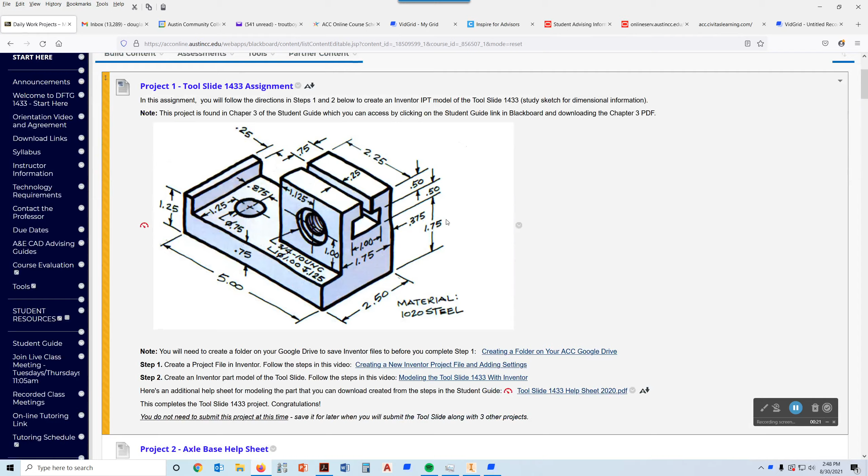Here's the first project you drew, the tool slide, and if you scroll down, you're going to see the axle base help sheet. This is our second project. And what we're going to draw is this front profile of this, and then we're going to extrude that. And so the profile is actually 6 inches wide. It is 3.5 inches tall, and then when we extrude it, it's going to be 3 inches deep.

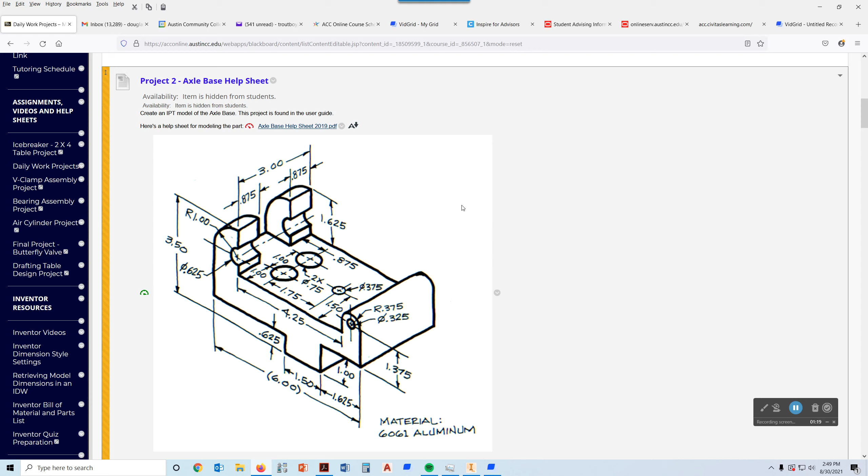At that point, we're going to add a fillet over here to the back that has a R of 1. We're going to add a hole that has a diameter 0.625. We're going to add these two holes that have diameters of 0.75. We're going to add this arc that's in here, and we're also going to add this hole that we have right here. And you'll notice that the radius of this arc is 0.375, okay?

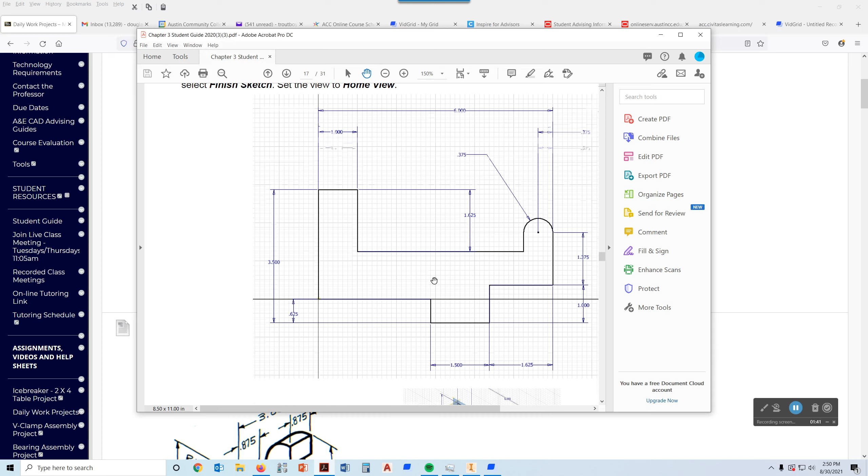All right, so you can refer to Blackboard to get help with this, or you can open up the Chapter 3. Let me scroll up here a little bit. You can pick on the student guide and you can open the Chapter 3 module there and download it as a PDF and scroll down, and you'll find information on drawing this project, including how to create the base sketch. And so this is what we're talking about with the base sketch. These are the dimensions that we really want to have that will allow us to extrude this and make it look good.

So I'm going to drag this out of the way, and I'm also going to drag Blackboard out of the way so we can see that we are in Inventor. We're going to come over here where it says Part and pick on Part. And when that opens up, one of the first things we do, we always project some geometry onto our axes that we see right here. And so if you go over to the tree, the browser over here, and we expand on the word origin, you can see that we have a YZ and an XZ plane. We're going to actually project their geometry onto this.

So if you remember this from the other day, we go to the project geometry button, and on the top button, we just pick on that top button. And then we come over here and we pick on the YZ plane, and we pick on the XZ plane, and that projects both of those planes' intersection onto the XY plane, which is this plane that we're going to be making our sketch on. And then we press escape. We get out of project geometry.

We go over to center point from the origin, and we right click on that and go down and select visibility, and that makes our center point visible. Now you could think of that center point as 0, 0 if you want to. The good thing about having this geometry in here that we projected onto our axes, our X and Y axes, is that we can actually dimension to those or use those to constrain geometry.

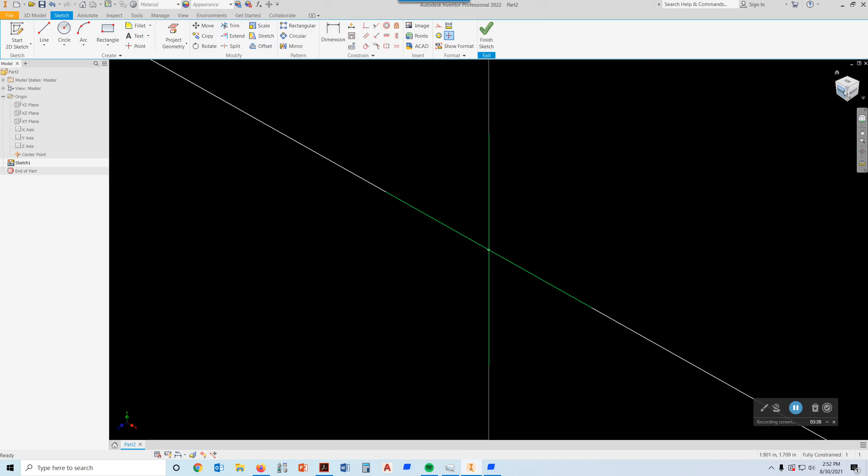All right, so I want to go back and get normal to my XY plane. And I'm going to hold down on the mouse wheel and drag this over because I want to draw right up in here. And like I said, I know that that is 6 inches wide, and I know it's 3.5 tall, and then I'm going to extrude it 3.

So I'm going to look at the dimensions that are on this object, and I'm going to think about, well, where should I start? And it seems to me that a good place to start might be right here at this corner, because I can come over this corner, down, across, up, and over to here, and up to here, and I can start drawing a lot of this. Then I can come in and add this, okay? So that's my plan. So let me drag this out of the way.

So I'm going to start by picking the line command, and I'm just going to come out here. I'm going to scroll out a little bit. I'm going to come out here into space and just pick a point. And then I'm going to move to the left, and I want to make sure that I'm seeing, you see that there's a little glyph right below my cursor there. And what that tells me is that this is going to be a horizontal line. And in looking at the dimensions, I'm going to type 1.625 and press enter.

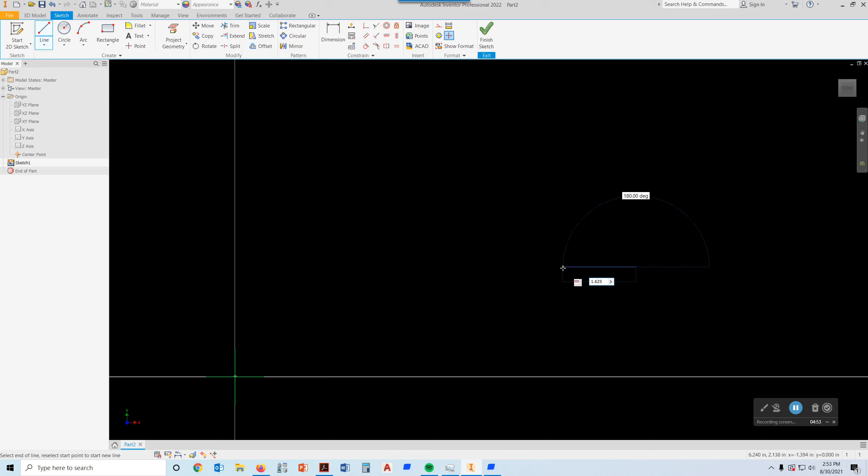All right, next I'm going to go straight down, so I want to make sure that it snaps to being perpendicular to that, and I'm going to type 1 and press enter. Now I'm going to go to the left, and make sure, you'll see it's sort of running uphill, so I want to go until it snaps right there and snaps perpendicular, and I can type 1.5 and press enter. And then I want to go straight up, and I want to go 0.625.

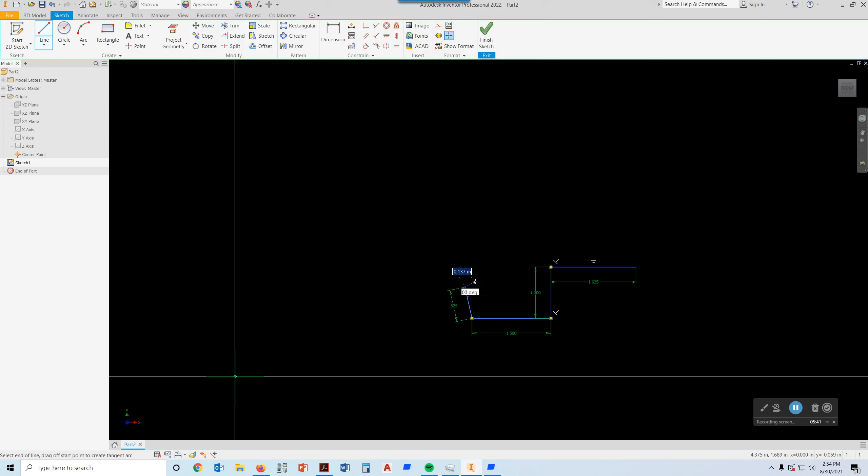Now I want to show you something. What if you didn't exactly go straight up? So I'm going to go off at a little bit of an angle here, and I'm going to type 0.625 and press enter. Now you can see that that definitely went off at an angle, right? So I'm going to press escape and show you something you can do with this.

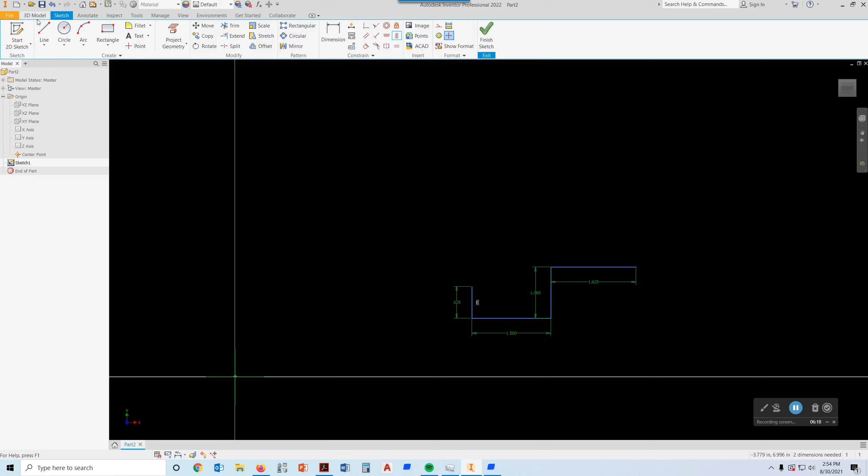Right up here you have a tab called the Constrain tab, and you have some options here, and one of those options is to make something vertical, make like a line vertical or make it horizontal or so on. So I'm going to pick on the vertical constraint and pick that line. And you're going to see there's a little glyph next to it. And so Inventor is saying, okay, that thing is going to be vertical no matter what. Okay.

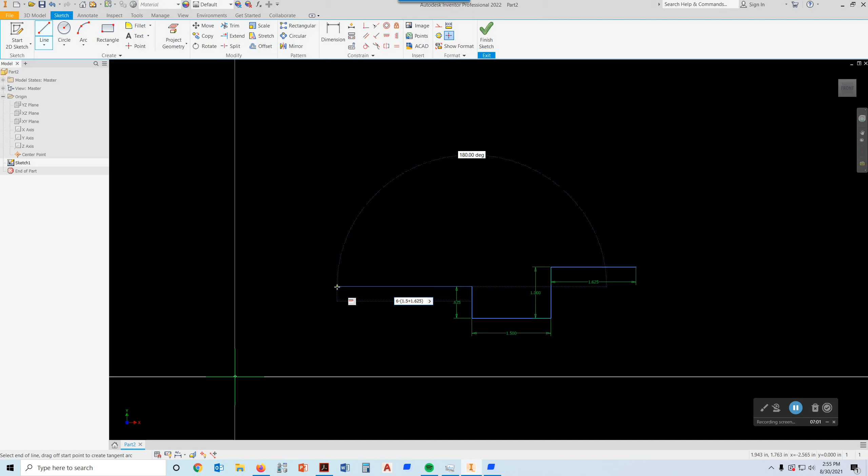So now I'm going to start my line command again. And then I'm going to pick right on this endpoint, and I'm going to move to the left. Now, how far do I want to go? Well, I know the total width is 6, but I've already put in 1.625 and 1.5. So here's what I'm going to do. When it asks me for the length, I'm going to type 6 minus, put in a parentheses, 1.5 plus 1.625, and then I'm going to close the parentheses. So I'm going to take 6 and subtract those two lengths from it and press enter, and that ought to be where my part ends, right there.

Okay, so from there, looking at the dimensions, I'm going to go straight up, and this time I want to go up 3.5 minus 0.625, because the total height of this is 3.5, so I can't just type in 3.5 here. So I'm going to type 3.5 minus 0.625 and press enter. Then I'm going to wait until it gets horizontal like that. I'm going to move to the right, and type 1 and press enter. And then I'm going to move straight down like that, and I'm going to type

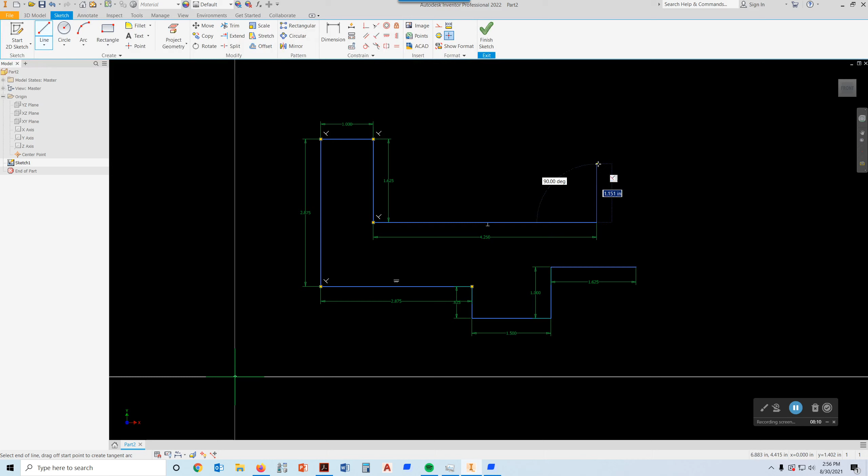1.625 and press enter. And then I'm going to go across in this direction, and looking at the sketch, I can see that it tells me that's 4.25. So I'm going to go 4.25 and press enter. At that point, I could come straight up and keep drawing, but I'm just going to press escape. And then I'm going to pick on the line command again, snap to this endpoint, and go straight up. And what I want to do is go straight up

1.375 and press enter. And now I want to draw this curving arc around the top, and here's the way you do that in Inventor. If you're connected to the end, you hold down the Shift key, and then you press your left click button, and you just move around like that. Now I'm going to go back. I'm going to delete this stuff out that I just put in there. I didn't mean to put all that in there.

Let's start it again. I'm going to pick on the line command, and I'm going to snap to that endpoint. And then I'm going to hold down my pick button and my Shift key, and move in this direction right here. And when I get back to the line, I'm going to pick like that and press escape. So I just drew that arc by holding down Shift and my pick button and just dragging over there.

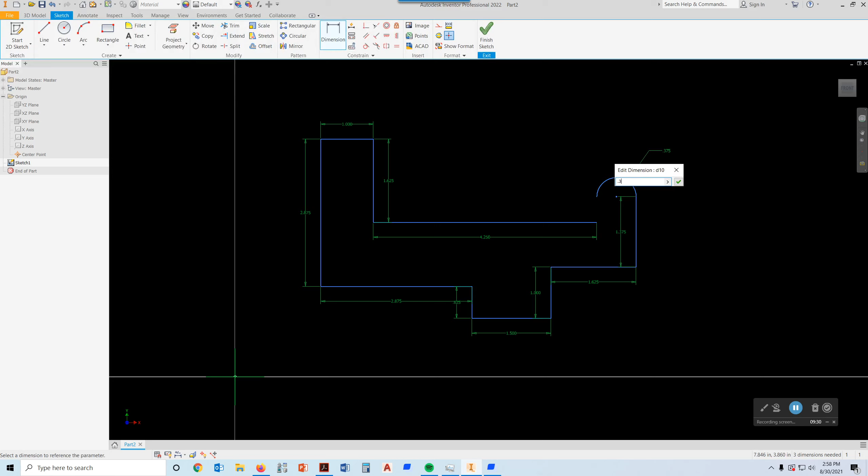Now I need to put a dimension on that. And what my dimension needs to be is 0.375, and enter. That's what it says. So that is the radius of that. So actually the distance from here to the center is 0.375, and from the center to here is 0.375. So in total, I believe that's a 0.75. Then I want to take a line and go to my endpoint right here and go up and pick on that endpoint right there and press escape.

Now, as I was making this dimension, right down here in this section, it was telling me how many dimensions it needed. So if I do an undo, for example, let's see if I can get back to where, right down here it's telling me that 4 dimensions are needed, okay? And as I continue to undo this stuff and add stuff back in, now it's still telling me that 2 dimensions are needed, but I can't imagine where they actually are. I guess that line right there, maybe it wants that. I don't know why it would.

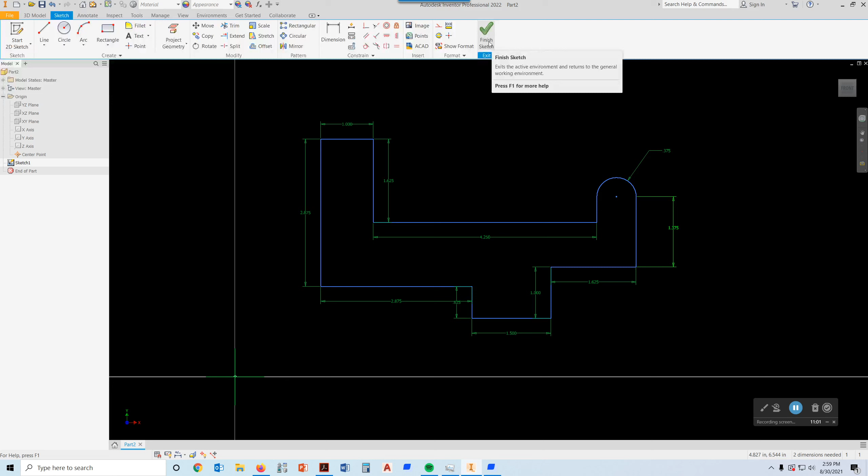But the point is, at this point, I don't see any reason why this can't be extruded. But looking at this down here tells you how many dimensions it would take to fully constrain this sketch. When something's fully constrained, it can't be distorted anymore by dragging something or anything else. So there must still be something in here that it doesn't like, but I like it, so I'm going to pick on Finish Sketch. All right.

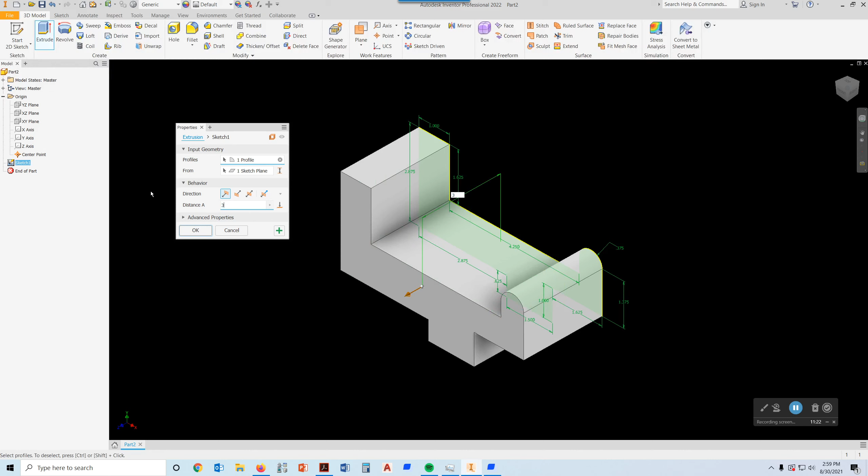Now, next thing I want to do is pick Extrude. And remember, when you're in a sketch and you're ready to extrude, you can just type E and press Enter, and it'll go directly into the Extrude command. And right down here where it says Distance A, when I pull this guy out, I want this to be 3, and press Enter. All right, so there's my base sketch. And so everything looks pretty good right now.

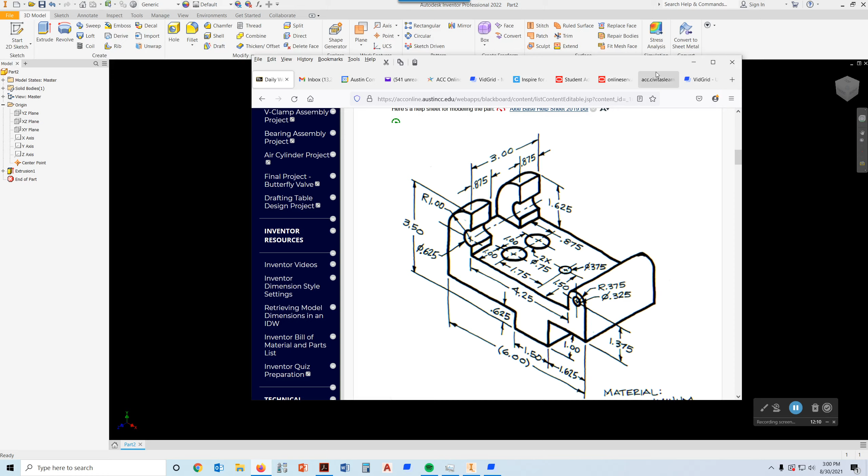So I'm going to add, there is a hole that goes right in here. And that hole, let me pull this up, is right here. And it's aligned right along this. And it is 1 inch from this corner straight down to where that is. Because that radius of 1.0, that is the center of this arc, but it's also the center. So we would say that the center of this hole and the center of this arc are concentric. The diameter of that hole is 0.625, 625 thousandths, okay? So that's what we're going to add in there, and we're going to also add this fillet that's back in here.

All right, so to add that hole, I'm going to pick on the hole command, and I was going to pick like right here, okay? Now, I want to make sure that what I have is a simple hole and that the seat says none. And for the diameter of that hole, I want to come right down here and type in 0.625. Now, I do need to locate the center of that hole 1 inch from the top, and I want it to be right on the edge of this.

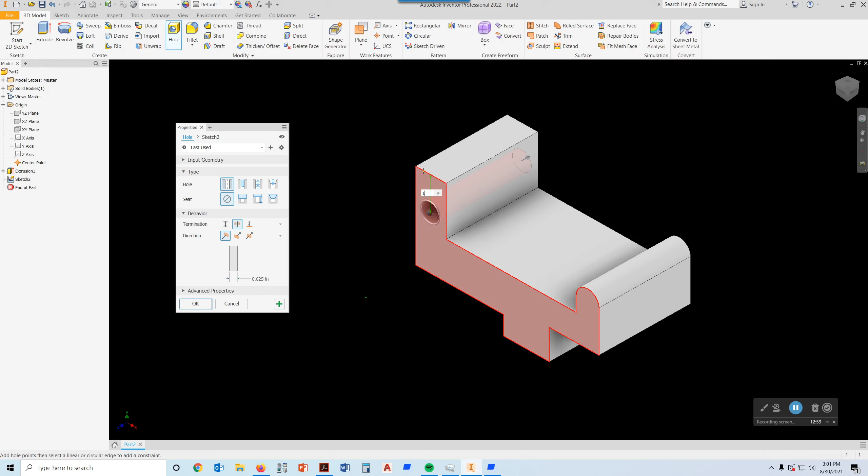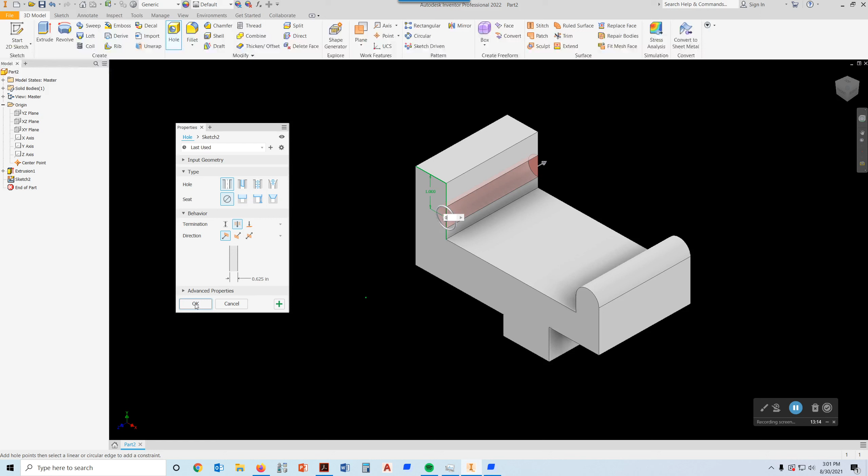So first I'm going to pick on this top edge right here, and I'm going to type 1. And that moves it. Now don't press enter, just type 1, and then I'm going to pick right on the edge here, and I'm going to type 0, and that should move it right to there. And so I've got the hole located where I want. It has a diameter of 0.625. It's right on the edge, and it's down 1. And so I'm going to pick OK and let it cut that hole for me.

All right. Now the next thing I want to do is add a fillet right here, and the radius of that fillet is 1. So we're going to use a new tool. It's this tool right here that says fillet.

You pick on the fillet command, and I know you may think you're supposed to say fillet, but we're not French. We're from Texas, and so we say fillet.

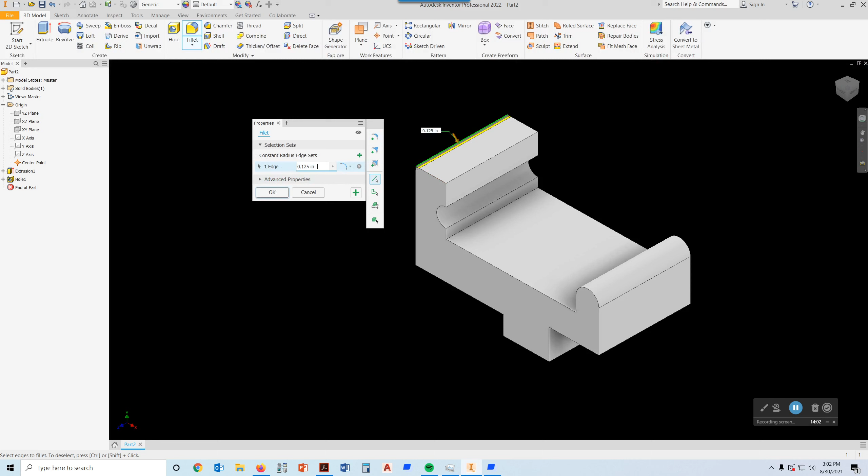And you pick on fillet, and what it needs to know is which edge do you want to fillet. And so we're going to pick on this edge right here. We could even spin this guy around if we needed to, but I'm just going to pick right there. Now, it doesn't know what the size of the fillet is going to be, so I'm going to expand right here, and it says it has 1 edge, but it thinks right now that the radius is 0.125, and obviously the radius is 1.00.

And I'll tell you, it's really not necessary to enter the 0.00 if it's exactly 1, but I just wanted to show you that. So it shows us what it's going to build if we pick OK. And that looks good to me, so I'm going to pick OK.

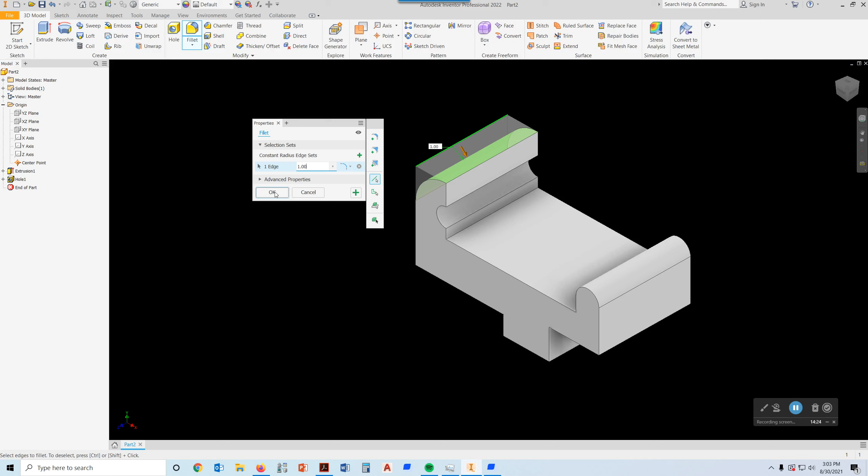All right, so we need another hole right through here that has a diameter of 0.325, and it's concentric with the center of this arc. So I'm going to pick on the hole tool, and I'm going to pick like right in there, and then I'm going to pick on the edge of this guy. Let's see how it centered it right there.

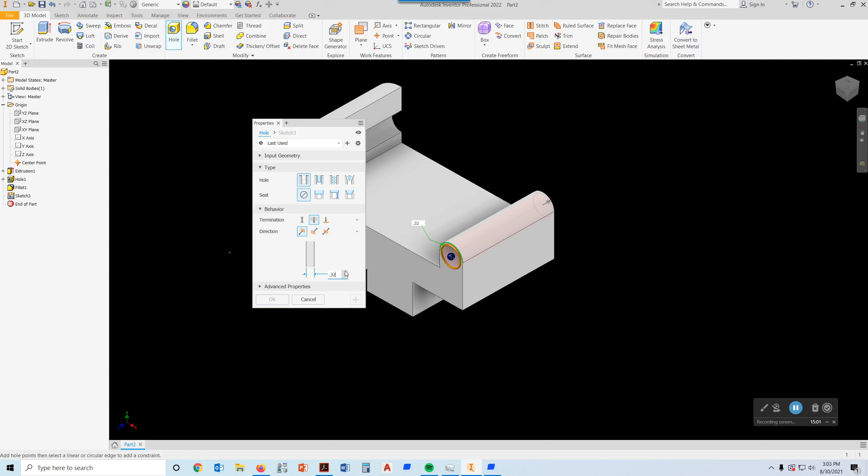I want this to be a simple hole, it's not a counterbore or anything. I want it to go through all, and the diameter for this hole is going to be 0.325. So it's going to be smaller, and I'm going to pick OK. And there that guy goes through. If we go to our front view and we look, we should be able to look all the way through both of those. So I'm going to go back to my home view again.

So I need to add 2 holes in here that have a diameter of 0.75. Let me see if I can drag this over, show you that. Okay, I have 2 holes here. They're 1 inch from this edge, and then they're 1 inch apart. And from this edge here, we come back 0.875, and they're both 2 times diameter 0.75.

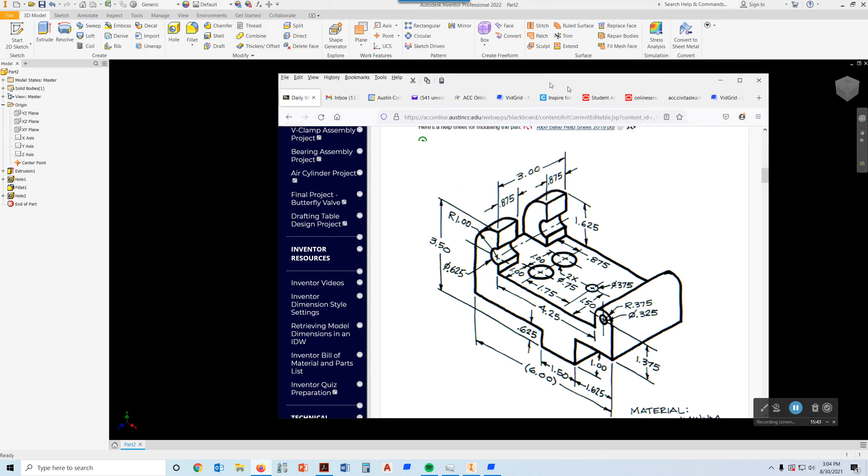So that's next. So this time, rather than going directly to the hole command, I'm going to actually make a new sketch. So I'm going to pick right here and go pick on sketch, create sketch. All right. And I'll show you a tool. This is the point tool right here. See, it's called point center point. Wherever you put these little point center marks, center points, you can build a hole on those.

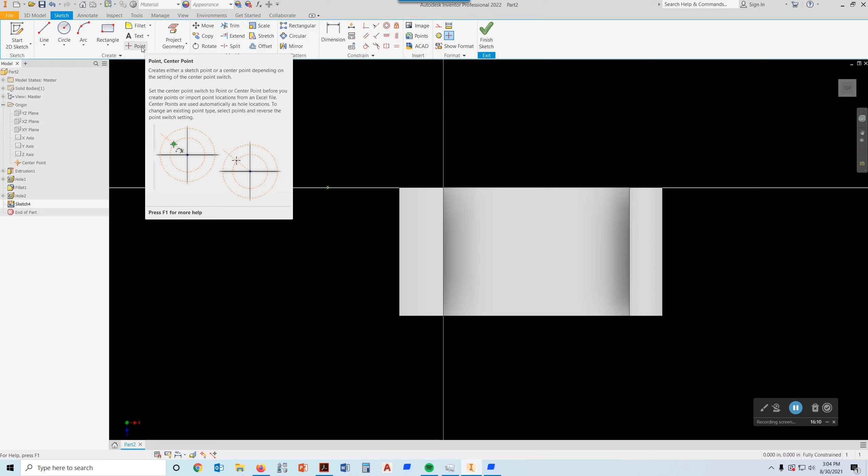And so I'm going to pick right there, and I'm going to place a point center point. You can see it's just a little plus, and then I'm going to follow straight up, and I'm going to pick again. All right. Now I don't have any dimensions on those guys yet, so I'm going to do a dimension from this edge right here to that one. And I'm going to say that I want that to be 0.875 and enter.

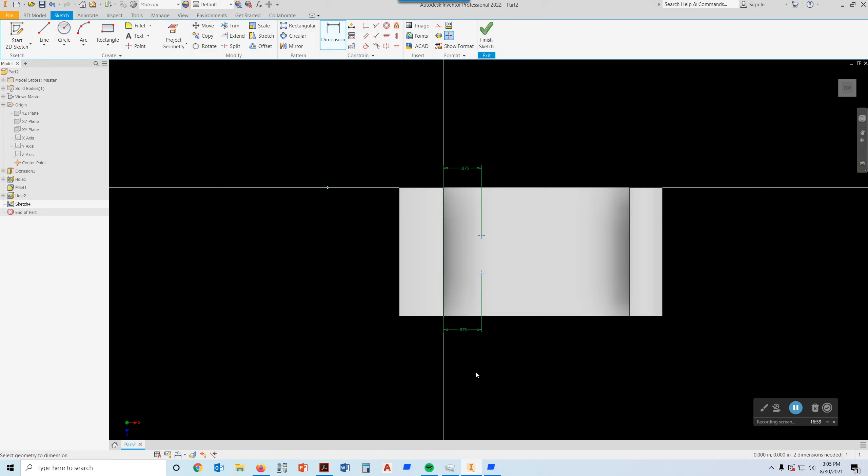Now, if they don't move together, just do another dimension from this edge here to the point center point and type 0.875 in there like that, and you can pick the green check there. We need another dimension from this edge, so pick on this front edge right here to the point center point. And of course, this one we want to be 1.00.

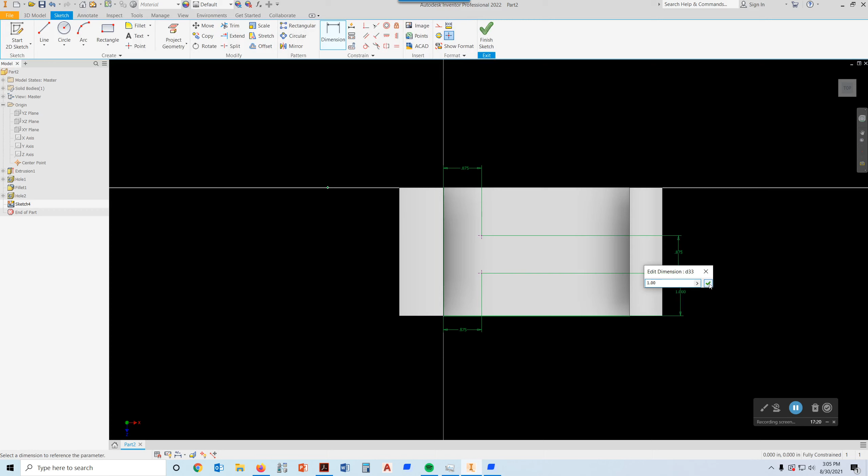And then we can actually place a dimension from this center point to this center point and drag it out here and type 1.00 and then pick the check mark. And at that point, we have placed the centers exactly where we want for 2 holes. And if we finish this sketch and we go to the hole command, it knows it's going to put 2 holes there. And because they're the same size and we're using the point center point, this is a good way to make multiple holes that are going to be the same size.

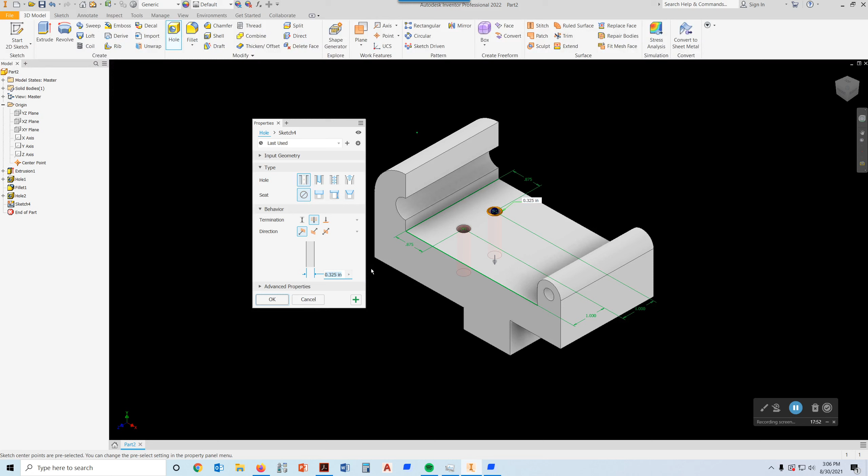And we want these to be simple holes. We don't want any kind of seat like a counterbore or countersink. And the diameters for these guys are 0.325. We press enter, and there are those 2 holes. All right, so we're nearly finished with this, but let me show you something.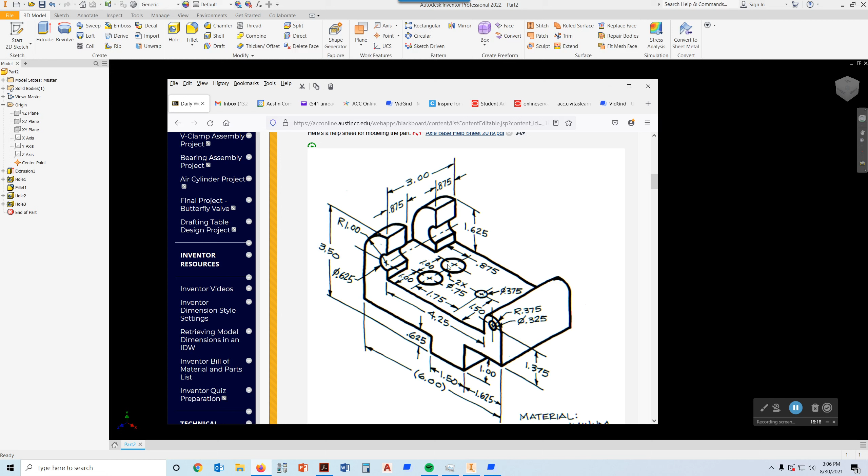There is a slot that's cut through here, and that slot starts 0.875 in from the left edge and 0.875 in from the right edge, and whatever's left, that's how wide our slot is. And the slot should be right on this plane. Okay, it's going to be coplanar when we cut it. So I'm going to show you how to do this.

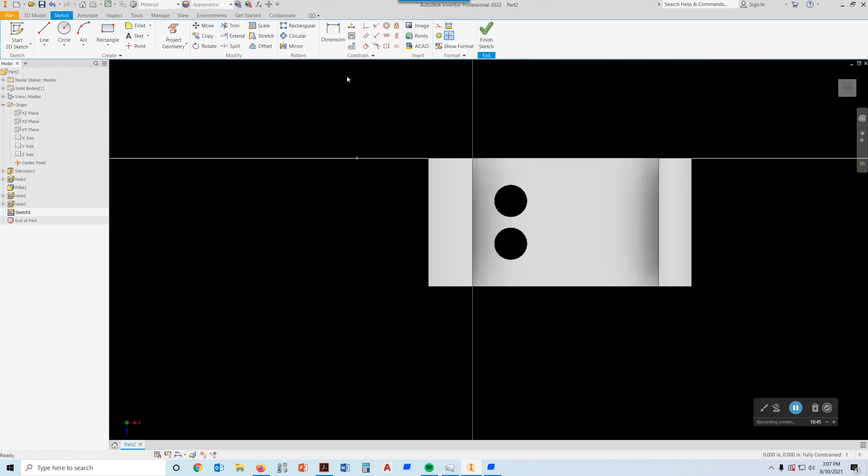A lot of people would choose the wrong plane to build that on, like they might try to build this plane and build a vertical cutting plane thing, but instead what I'm going to do, I'm going to pick here because I know it's coplanar. I'm going to pick here and pick new sketch. All right, now anything I draw is going to be on that surface right there. And so, in fact, I'm going to go to home so you can see it.

My sketch, anything I sketch is going to be on this plane right here. So I'm going to use a rectangle, and I'm just going to start somewhere in here on this plane, and go back into space, because all I need is a rectangle that I can extrude and cut out. I'm going to press escape to get out of the rectangle command. This rectangle you see right here is on this surface right here.

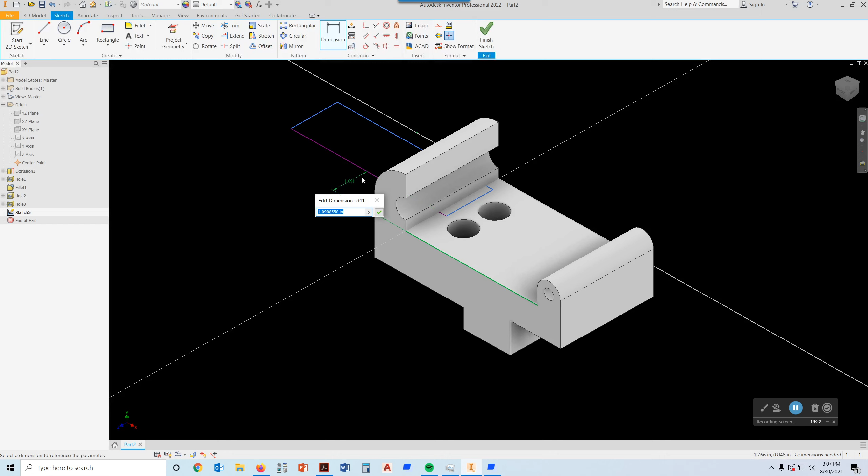Now I need to put some dimensions on it. So I'm going to do a dimension from this edge to that edge and move back in there, and I want that to be 0.875. Then I'm going to do a dimension from the back edge to this side of the rectangle and move that out into here.

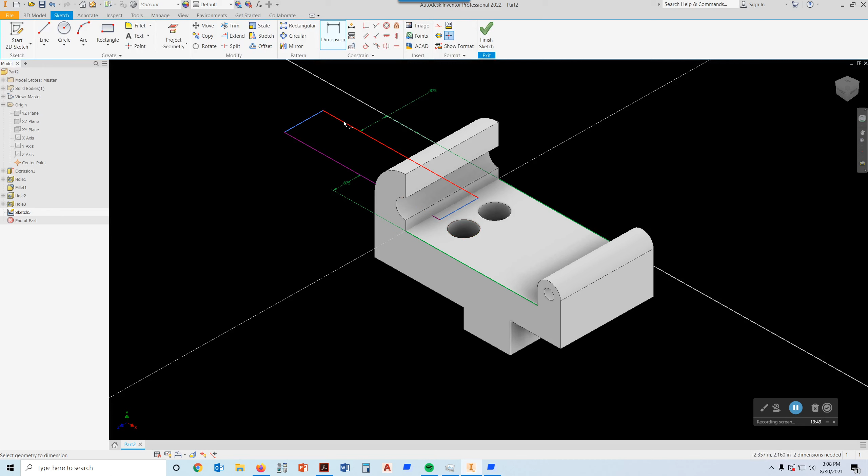I want that to be 0.875 as well, and press enter. At that point, I'm actually finished with the sketch because it doesn't matter that the rectangle goes all the way through. It's just going to make a big element that I can cut with when I extrude it. So I'm just going to type E and go directly to the extrude command.

And you can see what I just built. That's the rectangle extruded straight up. But I need to look at this line right here that says Boolean. The Boolean functions are when we union or join, or we cut, which is like a subtract, or we can intersect, and so on.

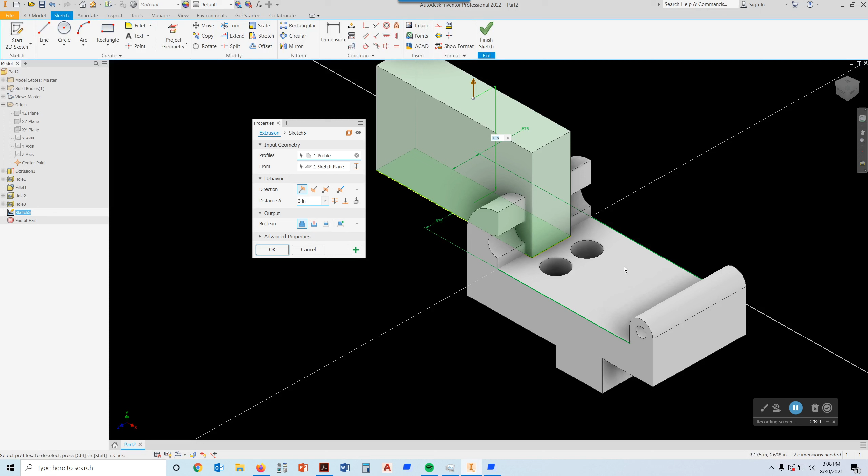What we need to do now is a cut. I want to cut the mass of this big cube from the mass of my part. So I need to pick on that right there, and I need to do a cut, but I still want to go up with it. You see how it's pointing down right now?

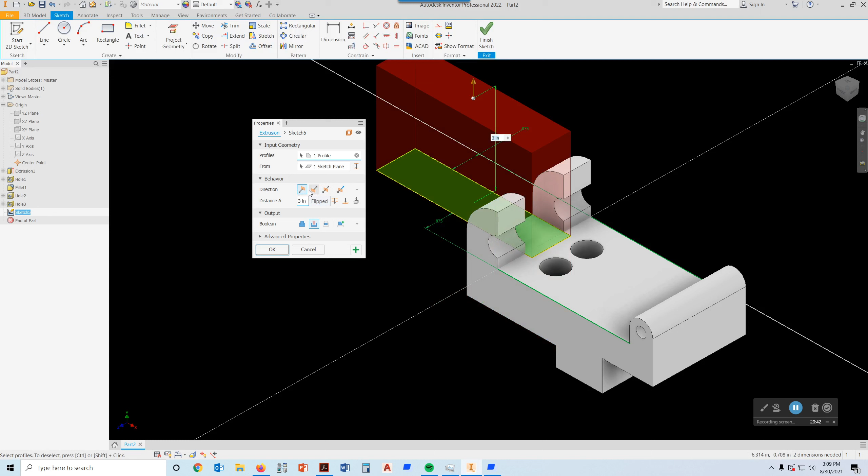I'm going to pick this right here. I want to cut up through the part, not down through it. So this tells me the direction to cut that sketch that's being extruded up. And if I pick OK, there it is - there's my slot cut through there, and the bottom of the slot is just right on this plane right here.

Now I'm looking to see if I've forgotten anything, and I have. There is a hole right here that is 0.375, dimensioned from the center, and it's back 1.75. We also knew that from here to here is 0.875. So as long as I place that hole 1.5 from the front edge, and from this edge here place it 0.875 plus 1.75, I should be good.

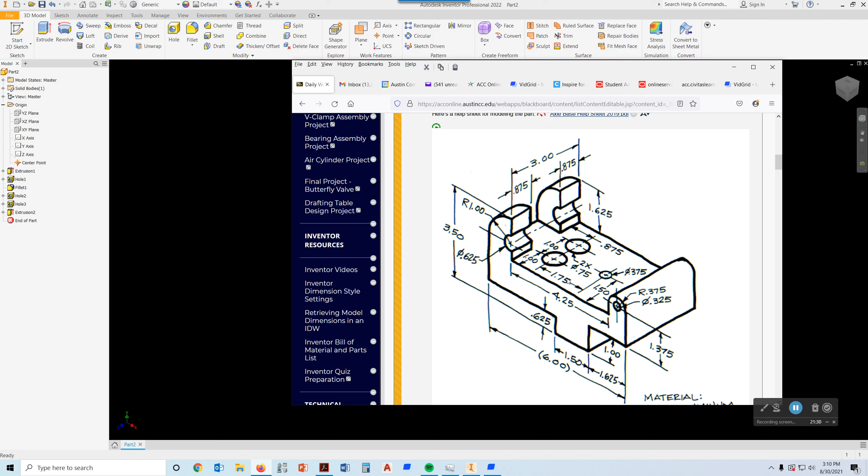And then the diameter is 0.375. All right, so let's just do that. Let's pick on the hole command, and let's just pick approximately where we think that ought to be.

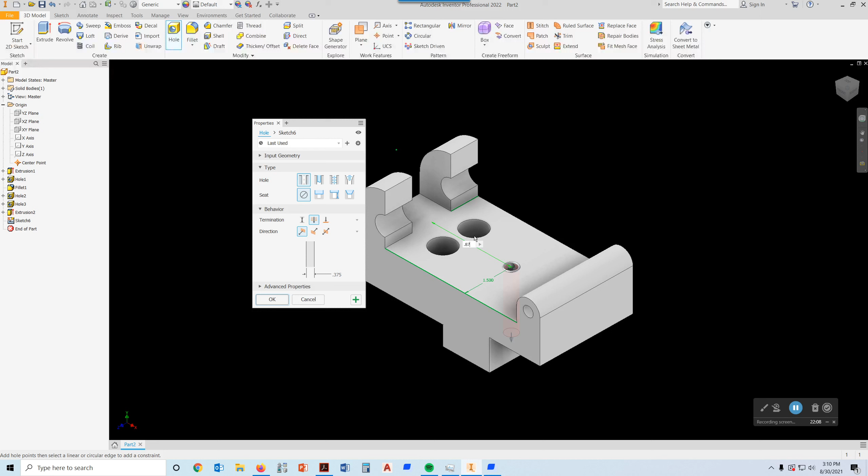Then we'll go right here and type 0.375, and we don't press enter after we do that. Then we're going to pick on this edge right here and type 1.5, but don't press enter. Then we're going to pick right here on this corner, and we're going to have to add 0.875 plus 1.75, right? Because it was those two dimensions that we needed, and that looks good.

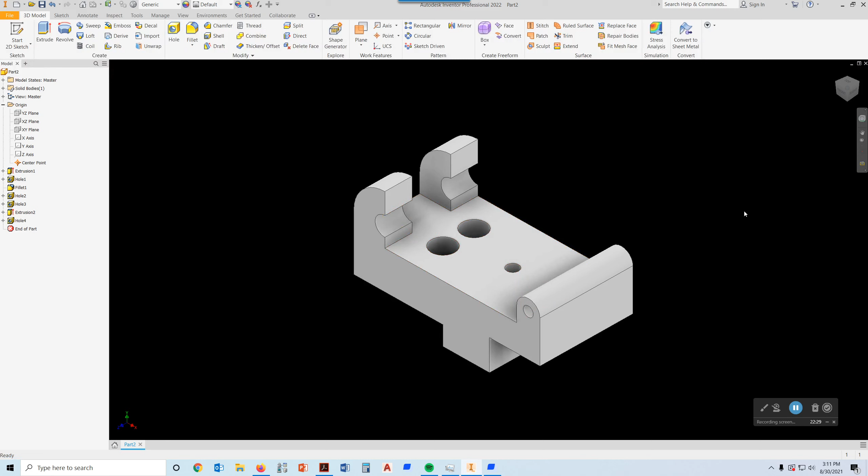At that point, we can just come over here and pick OK - you don't have to press enter again. We just pick OK, and that locates that hole where it needs to be. That hole actually should go down and go through our part - it's a through-all hole. The way we know that is this: whenever we have a diameter for a hole and it doesn't give us a depth, then we have to assume that hole is a through hole, which means it goes all the way through the object.

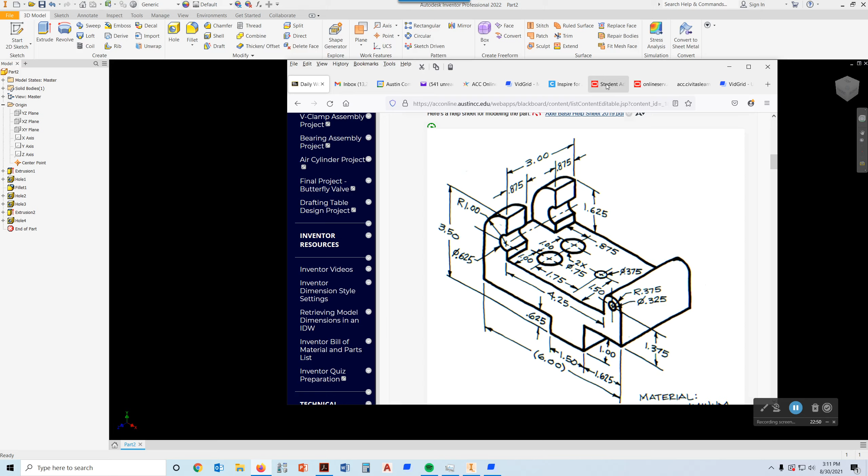At this point, what I would want to do is come up here and do a file, save as, and when this opens up, I would want to make sure that I'm in the correct folder, and right here I would type in axle base, using all caps. And when I'm done with that, I would hit save - just pick on save right here, and it should save into your project folder that you made last week on Thursday, I think it was.

So anyhow, that's how we're going to make the second model, and this is your assignment for between now and the next class. All right, so thanks for watching, and good luck.